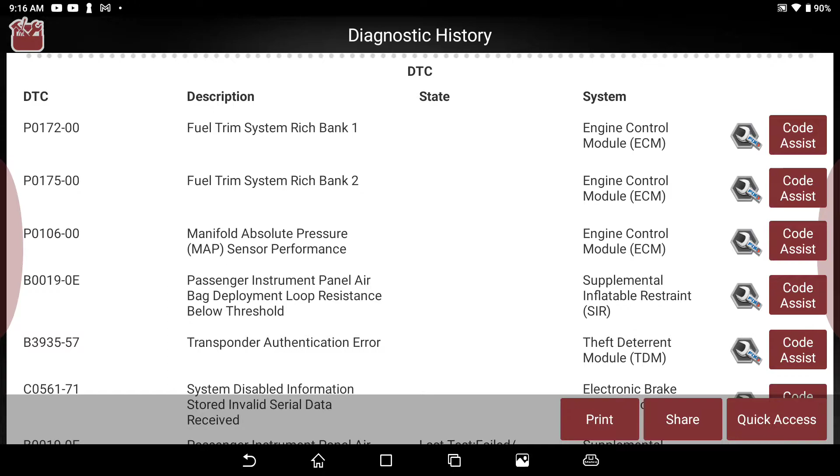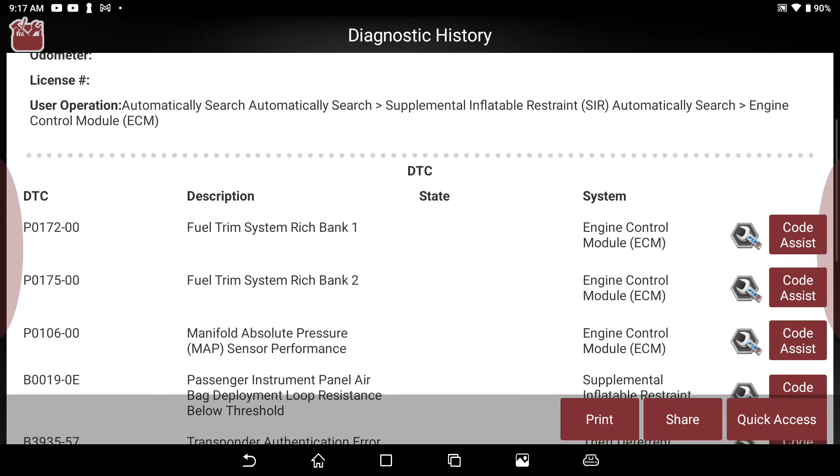We went in and worked on the instrument panel airbag issue, but we also pulled off rich conditions that were setting codes, and a manifold sensor code. We were going to look and see, we've erased most of this already, but we clearly still have a trimming concern present in the vehicle.

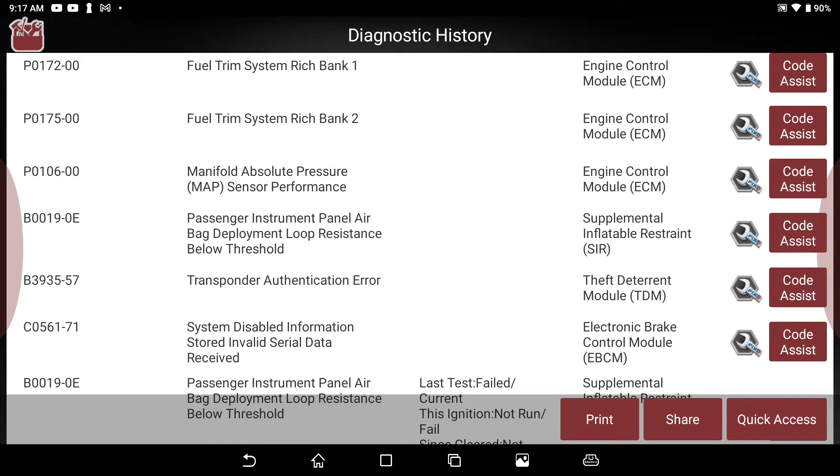I'll show you some of this. We'll go into Maxfix on the B0019-0E, pull it up, and close out the ones that were open so I can show you how this functions.

We have diagnostic trouble codes. We're looking at the OE code, let it finish. This one was on the instrument panel. B03 we don't see on that side, so we'll move over one more. Again, there it is: instrument panel airbag deployment loop stage resistance below threshold.

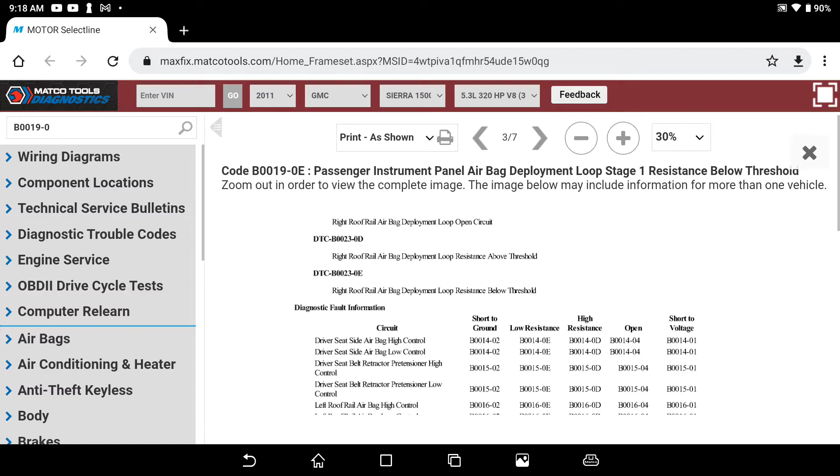That's the code we had. I don't think we can enter from this one, but I'll take you through the other data stored. You can see a 02 is short to ground, 0E is short, low resistance, 0D is high, 04 is open.

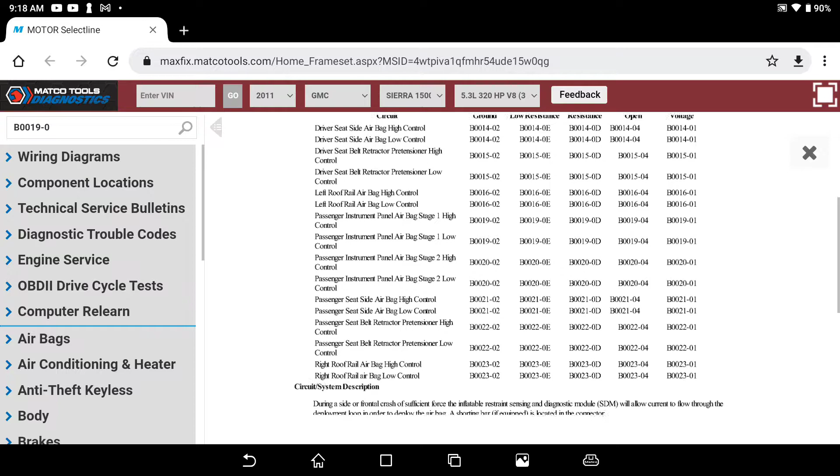Short to voltage is 01. If you look at these as they send them to you, you can see them across the top there, short to ground. We can go into wiring diagrams.

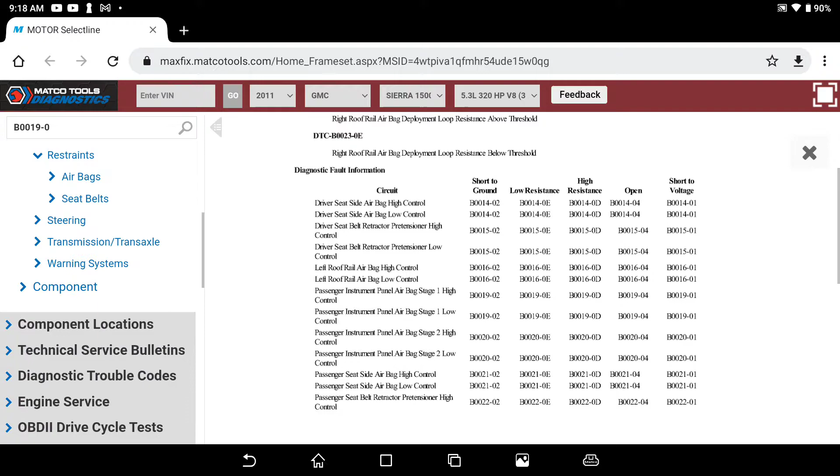From here, we'll go into wiring diagrams, system, we'll pull up restraints, there it is, airbags. This is what? I believe that's not the one. Yep, that's not it, we'll go to the next one. There's what we're looking for, I believe. Yes, this is our inflatable restraint module, steering wheel module.

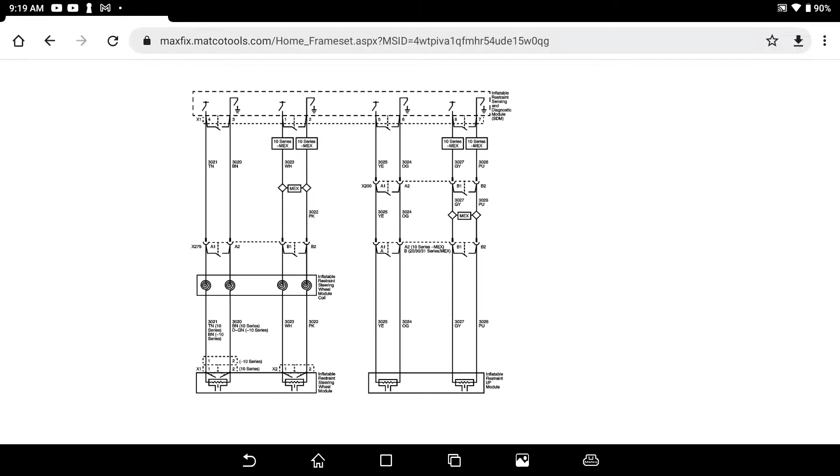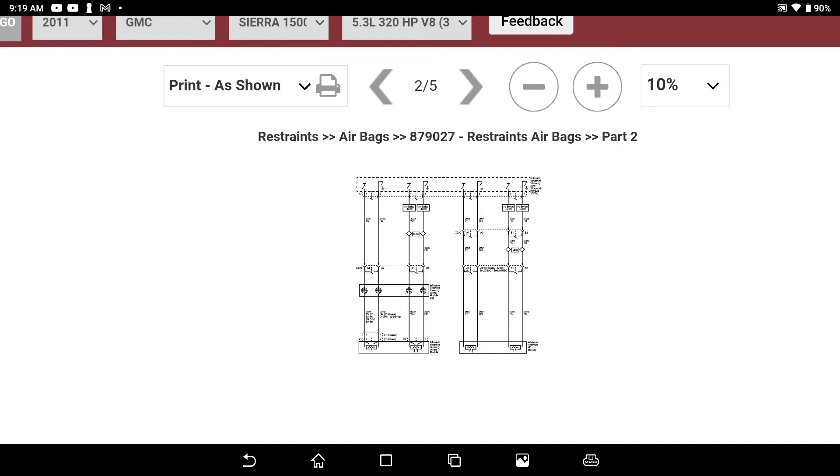This one is present in the instrument panel, passenger side. And what it's saying is, I think B1 is our issue. I need to verify, but that is the issue on that one, where we've got low resistance to the circuit, saying they're shorting between each other, more or less. That's what we got going on.

We corrected that yesterday. Found a chafed wire, the way it routed through inside the dash, shorting on an actual metal strap that secured it to the structure that was part of the instrument cluster frame. Then there's a little tab in there that bends over, the wire hangs in, and apparently just chafed it and shorted to each other. Odd one, little bit of trouble to find.

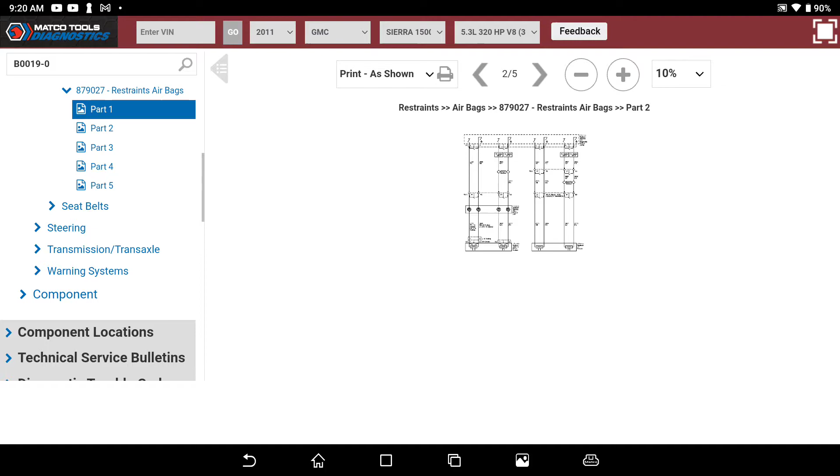All right, we'll get out of here. We'll go ahead and start a scan, which I believe all the codes are cleared, so we're not going to get anything from it. So we'll go ahead and exit, and we'll go ahead and go to automotive.

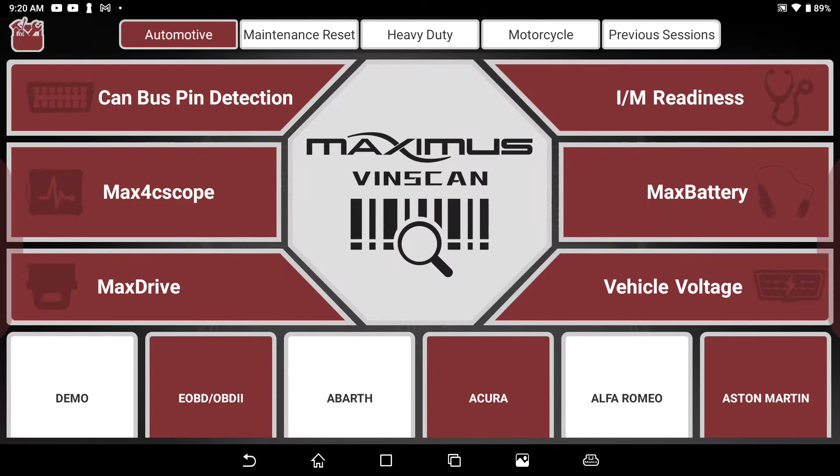I'm going to do a full system scan for you. Switch is on, I believe, I'll check. Switch is on, we'll see if there's any codes in the engine module.

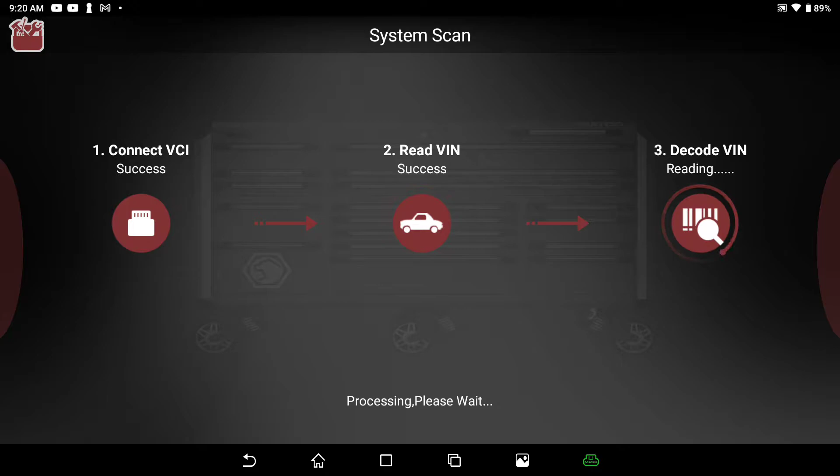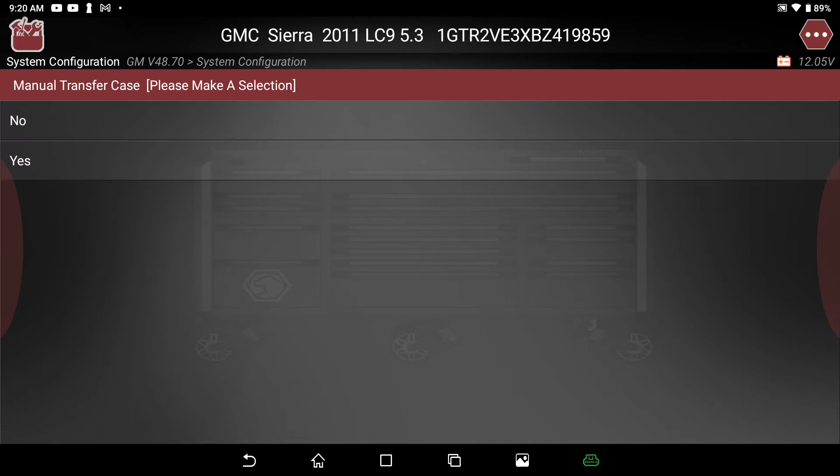We got many codes elsewhere that we're not pursuing. Hopefully you guys can hear my audio, I don't know if you can. We'll do a diagnostics, this is similar to the launch platform. You'll see it as it's presented: we have no manual transfer case, we have automatic air conditioning.

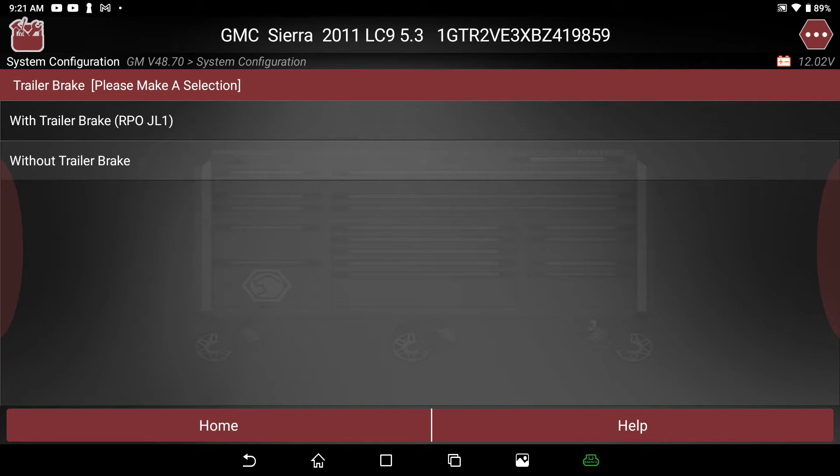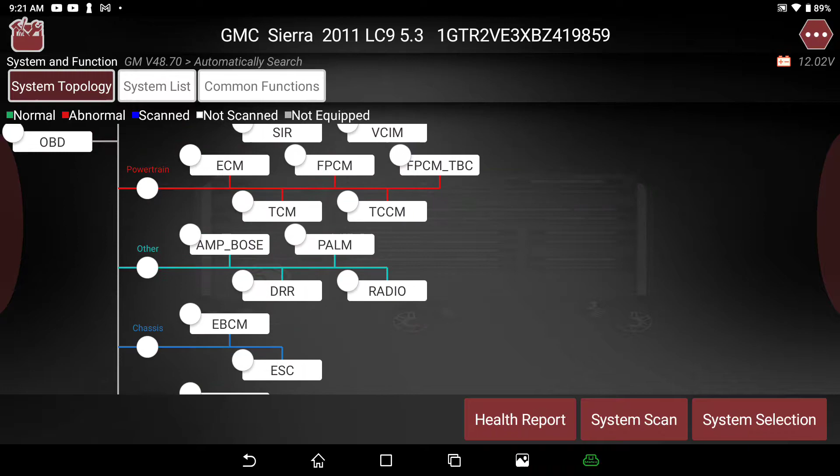Alright, so now we're going to do a health report and see if the ECM has stored any codes. Did a little run yesterday. Yes, we got 2 codes stored. My suspicion would be the P0171 and 174, I believe it was.

Once again, we're not concerned about any other module at this time. Let's see if our airbag module is still not having the code, since we corrected the issue with the wire. Hopefully it does not, figuring we must have solved that one.

Finding that problem, it was a current code, a hard code, constantly returned. Found the wiring, corrected the wiring, the code did not return. Yesterday, got off of it and moved on.

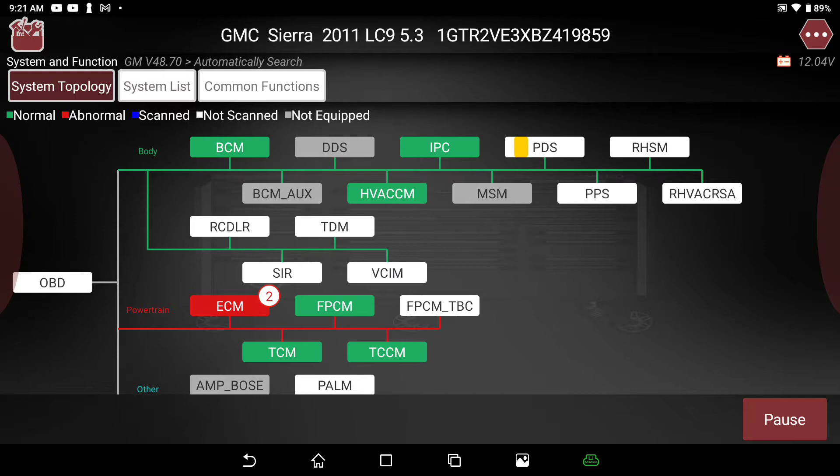Did a clear and then ran for a while and saw a poor running condition, obviously. MAP could be a contributor because we saw a code on the original scan of the MAP, and the lean codes, I want to see if they've returned. But this is scanning all modules.

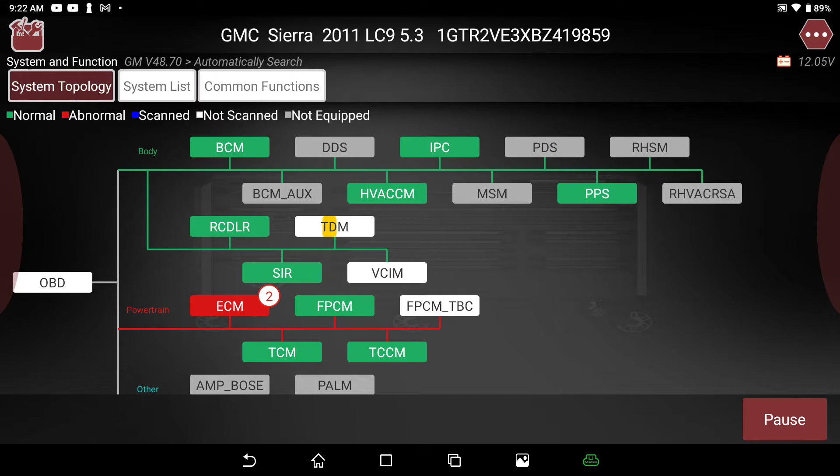Here's my airbag, see, yep, still good. Lucky enough, solved that problem apparently.

Are we all done? We got one to go. So all modules have now been scanned. So we're going to go into engine, and we see we've got the 175, 170, 172, 175. They've reset, no surprise. So we're going to go in here.

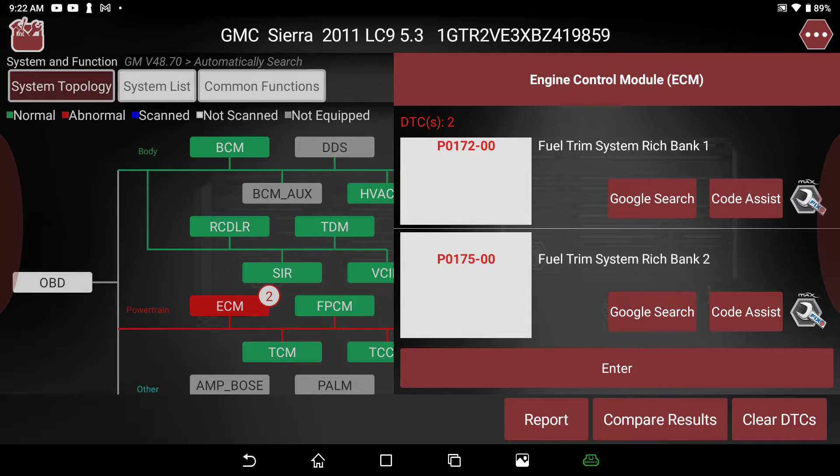We're going to do a full scan again, or read fault codes, and we'll see our freeze frame. And we'll look at the freeze frame and see what trim state is at the time. Freeze frame.

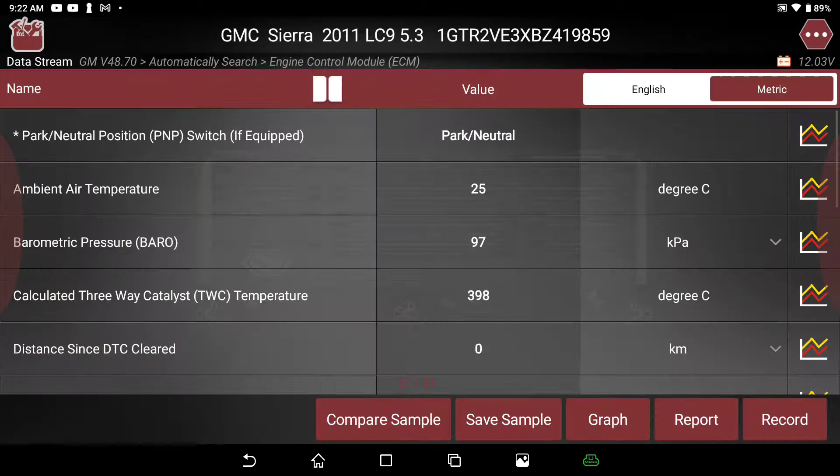MAP 2, we probably should take a peek at MAP. Fuel tank pressure sensor, we're not pulling any vacuum. Makes us think purge is not causing a problem, if the sensor is correct. That's the next question.

O2s, not really showing rich in this condition, but our trims are really negative downstream, whereas my upstreams aren't quite so negative. That might get us something for a little hindsight, because we're not trimming that hard upstream, but our downstream is really asking for some trimming.

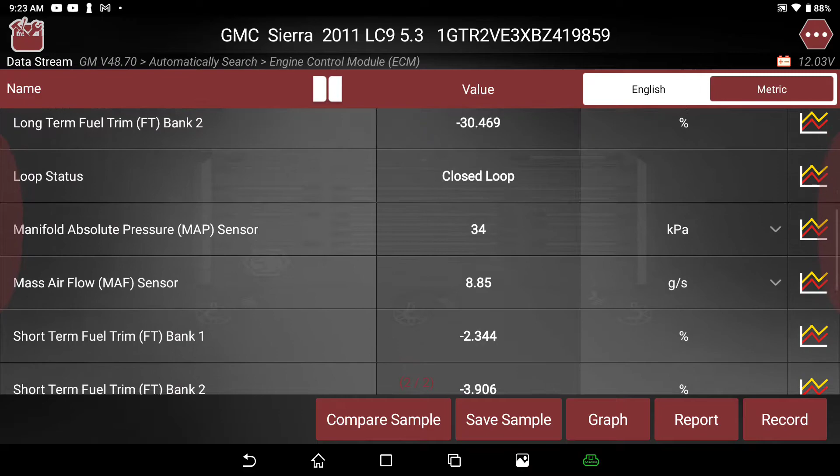TPS is at 10.58 percent, that would need a little investigation. At an idle, it's probably in the vicinity. What's our actual engine idle? Does it give it to us? Might be on the page before, let's take a look.

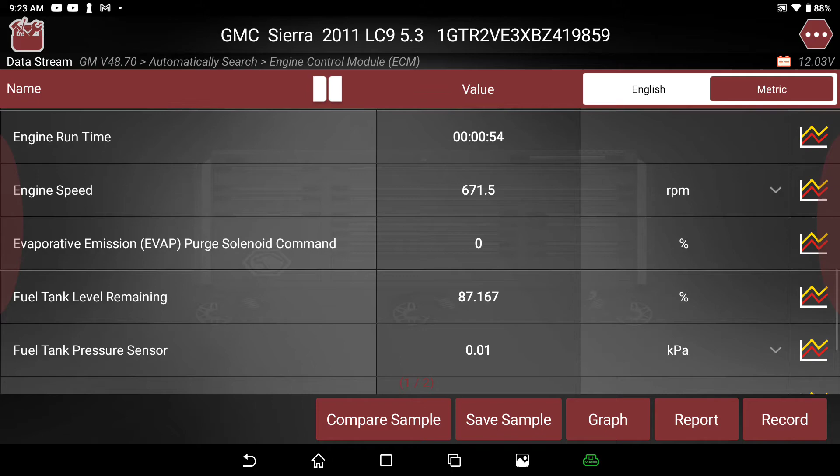Engine speed 671.5, that's in the vicinity of an idle, so it looks okay. I did not see the map, take a look again. Map. Oh yes, our map looks questionable. Let me change that to HG.

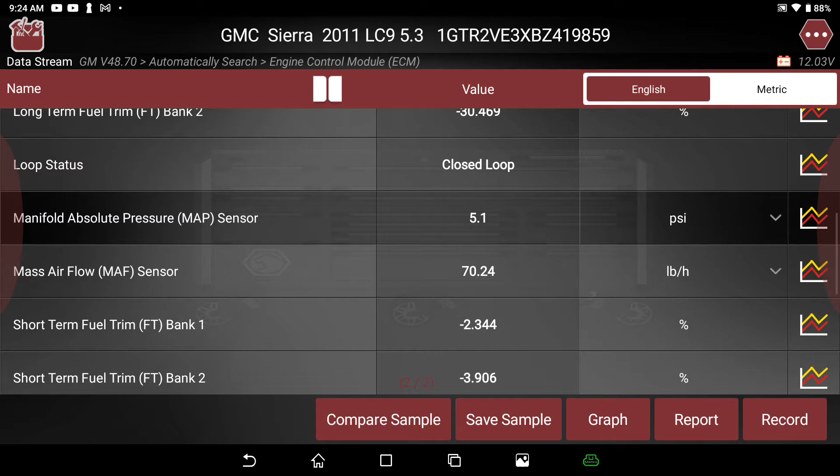There we go. Looks low. I can't get the voltage, unfortunately. I'm more familiar with it. We'll do a quick look, but it looks a little off to me.

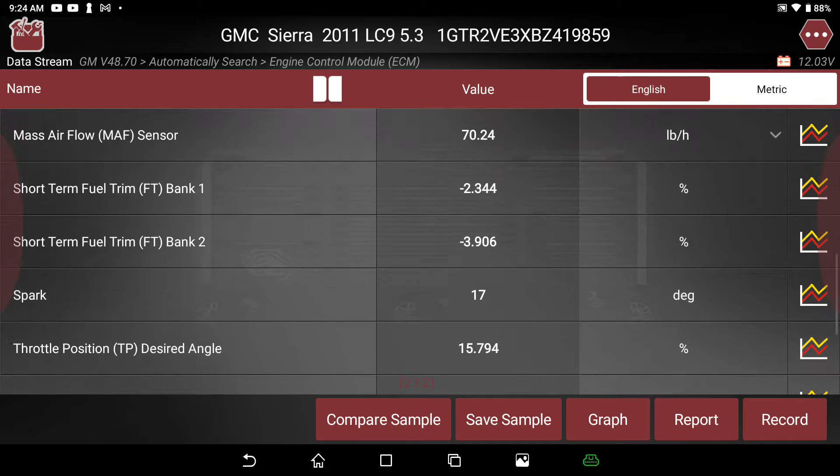So our map may be a contributor, or just a symptom from our fuel trim condition causing the engine to run poorly. But that's, you know, food for thought, an area to look.

But we have the screenshot. What I'm going to show you here is I can simply hit report. I'm saving my freeze frame, and I'm going to go back and save to the other page because it won't save both. Hit report, save that freeze frame. Now I've got that freeze frame saved.

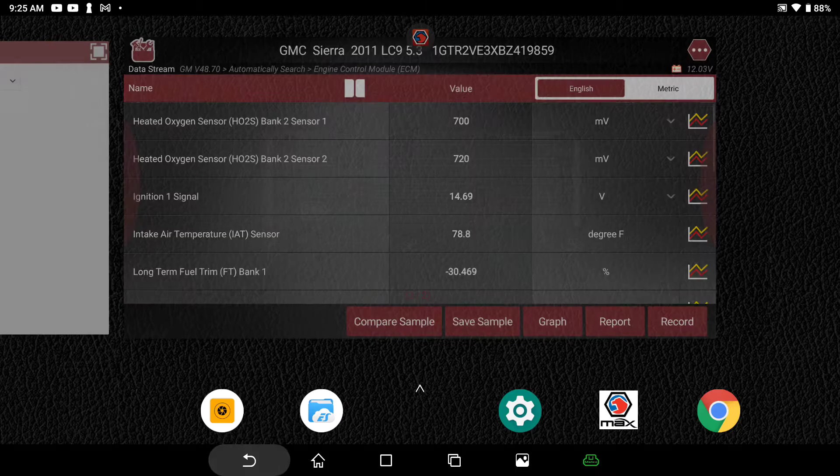It's actually saved. When I did my full system scan, it was already saved. We'll go ahead and jump out here, get back in. We'll go over here and pull it up for you. Here's our reports - this is my full system scan that was saved without saving.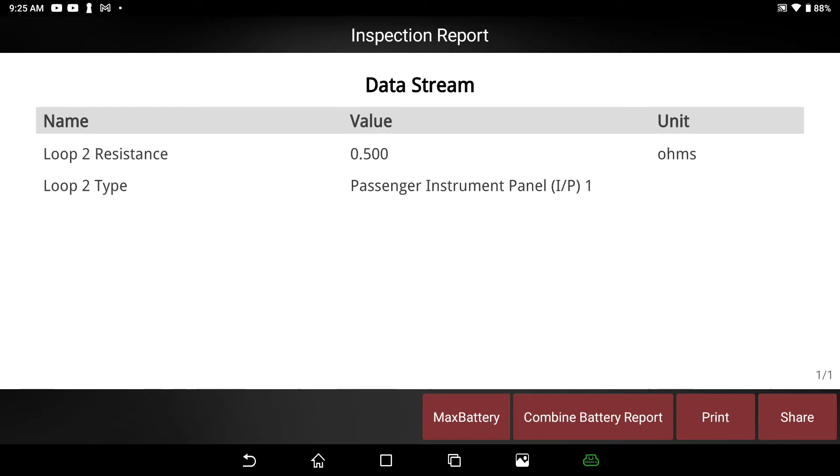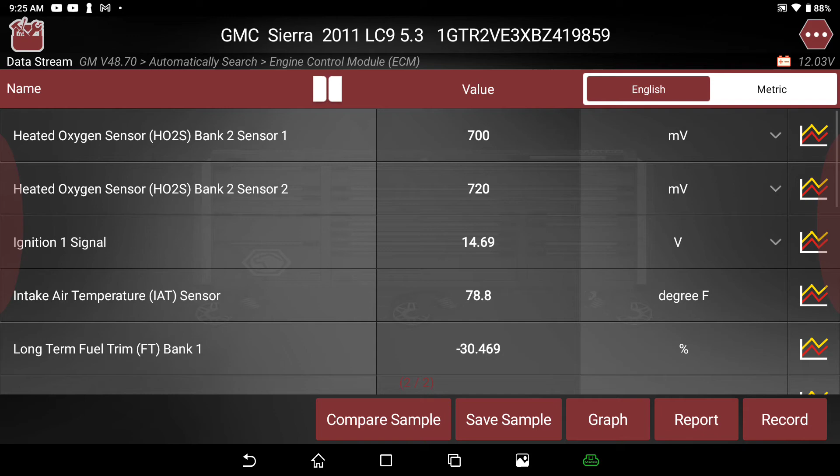Nope, wrong one. We may not actually have saved it. This is my freeze frame. So let's exit, exit, go back to our scan tool. And we'll go back to the freeze frame. All we gotta do is exit here, and we'll be back in our freeze frame.

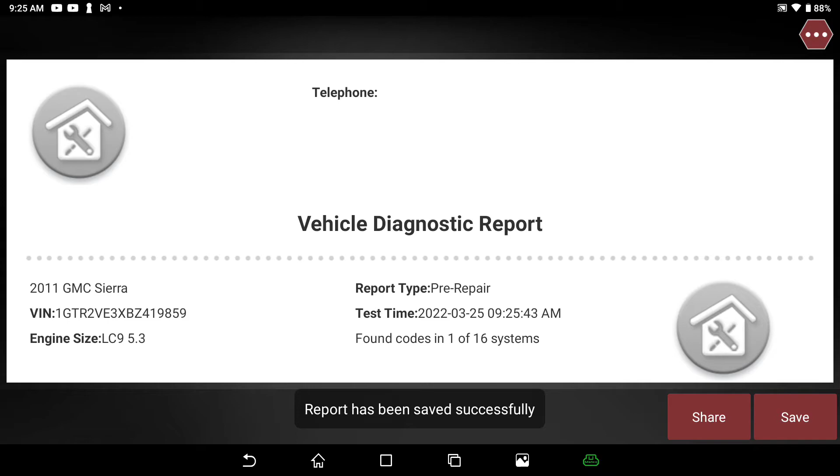And we'll go ahead and report, save the report. It's saved, now the report is saved. I've had some cars where it saves automatically - this one didn't, I don't know why. Let's make sure it did. It has been saved. All right, back in the ECM.

As you can see, the tool navigates fairly quickly. Really don't have much issues. I'm going to go ahead and start the vehicle and do a look at the trims real quick.

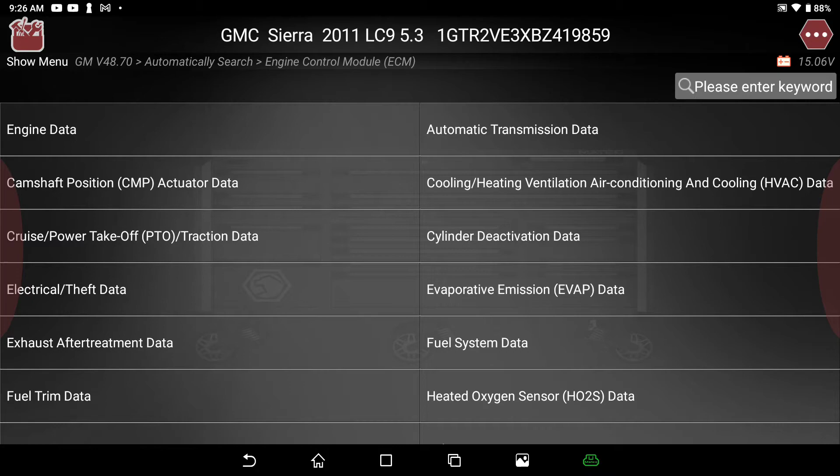Exhaust is obviously modified too - you can see that by the sound. I want to go into the fuel system. We'll go to fuel trim first. Airflow calculated, barometric pressure.

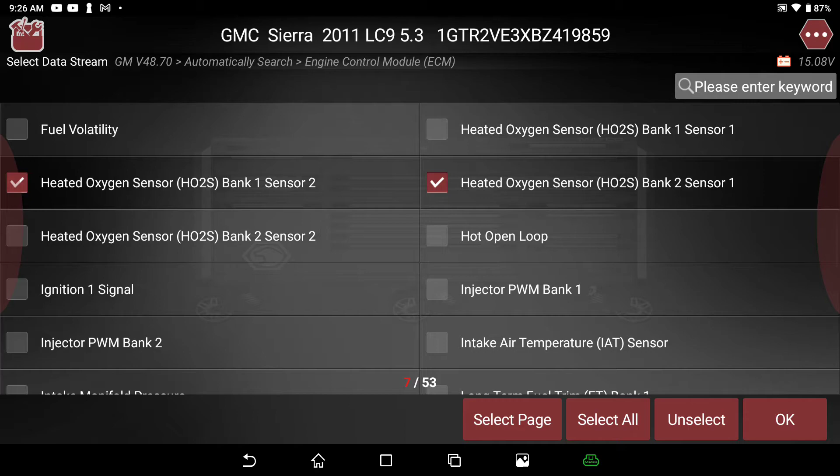Streams, and both downstreams, intake air. And here's long-term, short-term. We can actually load these.

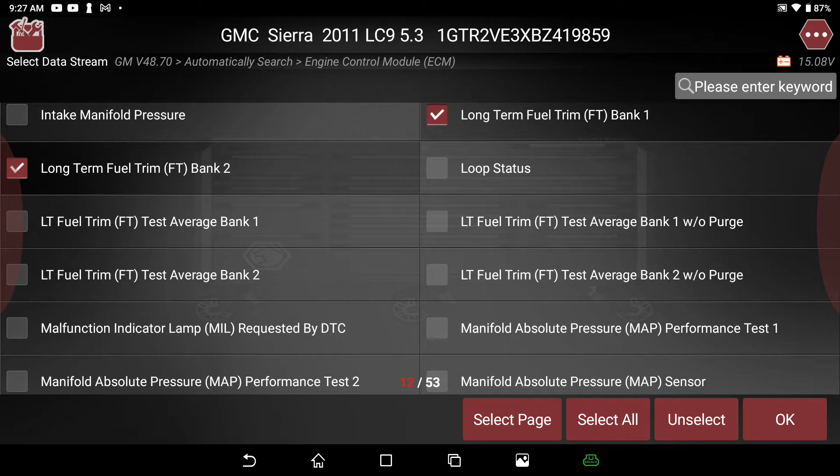This thing handles it very well, by the way. I'm not going to look at the map test. Long-term fuel trim bank 1, long-term bank 2. I do want to actually see mass airflow, and I'd like to see actual manifold pressure.

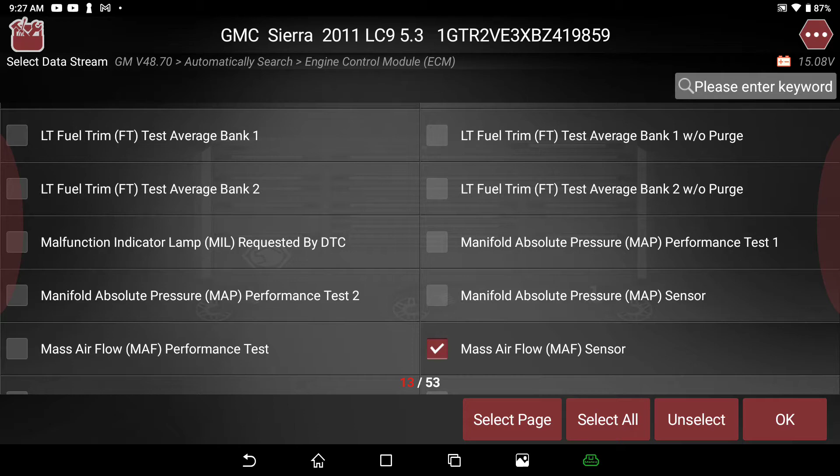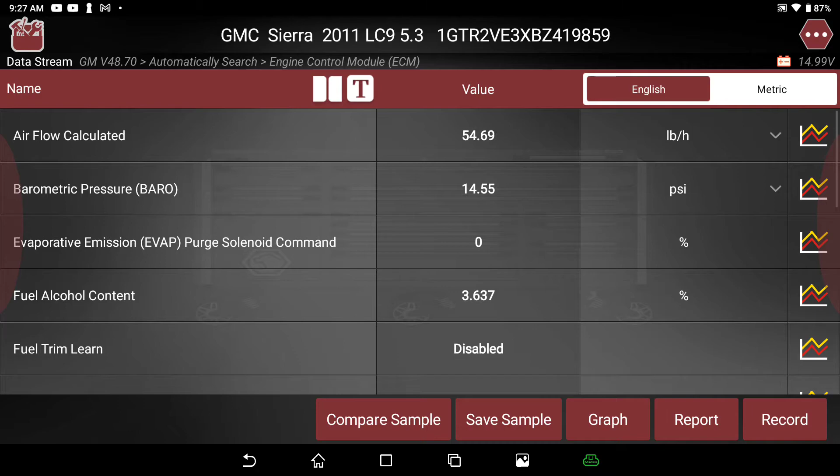There it is. Short-term. Alright, we'll grab those for now, pull them up, we'll go ahead and do a graph. We've got them up, I think we've got them all in there, yes.

I don't think that is normal. I'm used to seeing 8 to 9 on these engines. So that seems odd - that is definitely a questionable contributor.

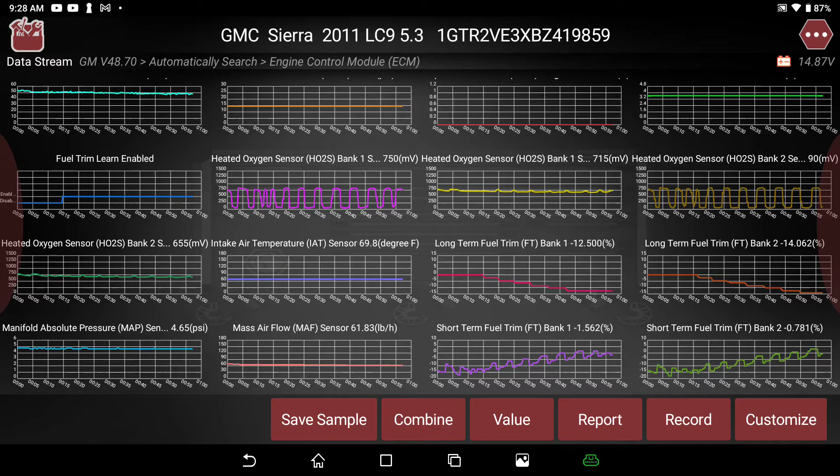Where is our mass air, calculated flow 46? Of course, the setting is pounds - it's one of the things. The fuel alcohol content is 3.67. I reset it yesterday to look into this after seeing fuel wasn't - it was 10%, I think it was reporting 15.

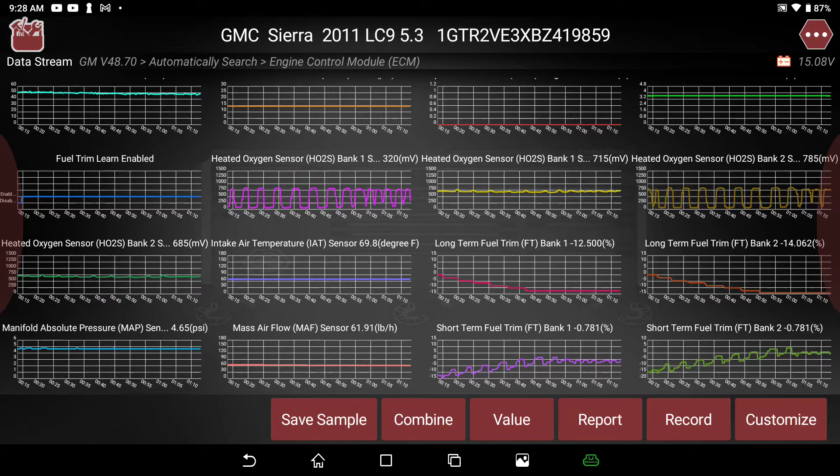Where is that mass airflow sensor? I don't have another window, so it should be right there. It is, yeah, that is questionable. Let me exit and pull back up and load and see what that mass air has to say.

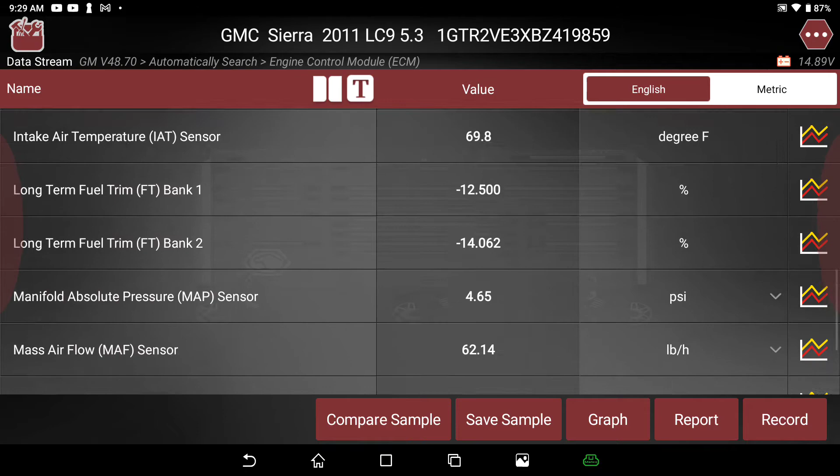Mass airflow, we'll change the setting. That's pounds, let's go to metric. Grams per second, 7.34, so it's not that far off. This is a 5.3, so we're slightly off.

We're slightly skewed. They do have a modified duct tube that looks slightly larger than OE, because I got another vehicle in the shop - the OE is considerably smaller. But I just want to present some of the stuff that this thing gives you.

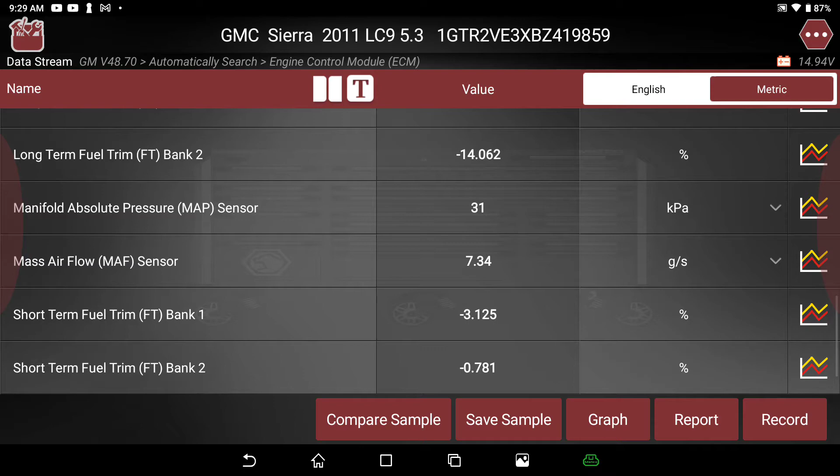You have your Maximus Fix, your data stream. You can pull up data stream from here, and of course load your fuel trim data if you wish. I'll just select all on this one - you'll see how quick the tool responds. It says I can only do 16 in this area, but if you're in the other area, you can.

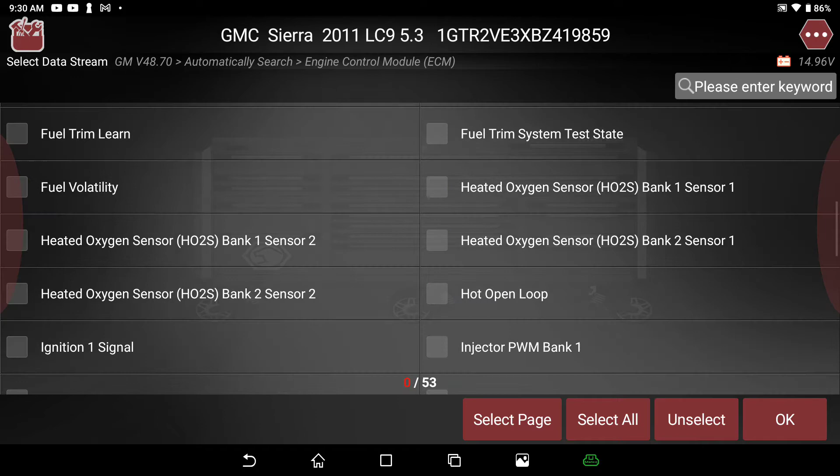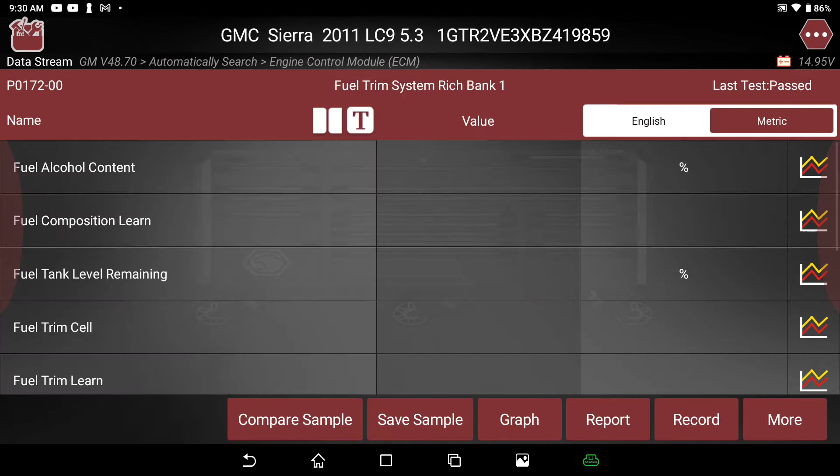So I'm just going to load some, we'll load 16. Out of nowhere, around 16, should be close - you see how quick it presents it. Pull up a graph, I missed one. Go ahead and exit that again. As you can see, the tool operates very fast.

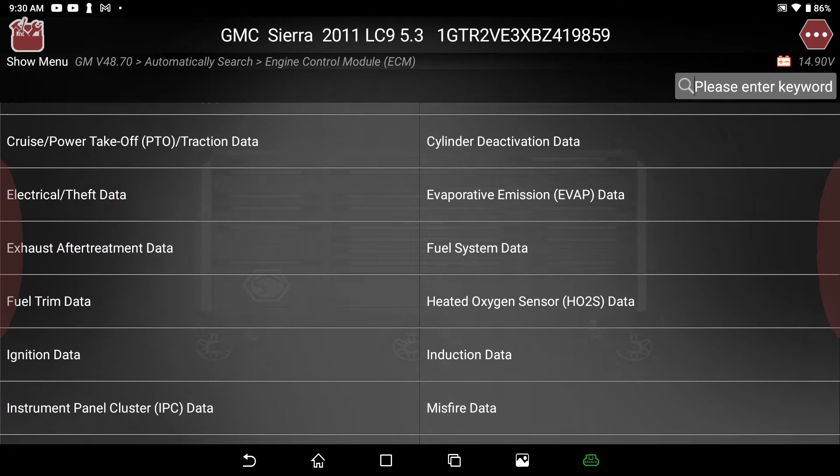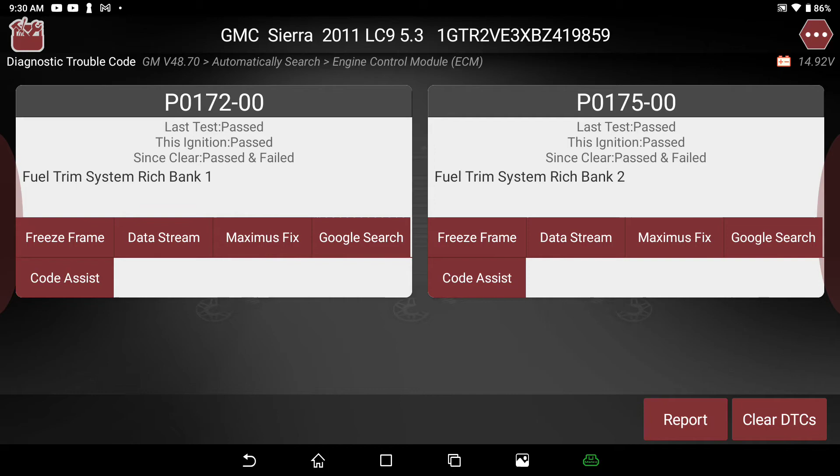And in my opinion, it is fast. Let's go with engine data. We'll select all 62. Although we're back in the same area where we can only select 16, so I'll enter it different this time. We'll go ahead and exit and pull up your data stream. And we want event data.

Now it pulls up your event data. You go to your Maximus Fix from here. It will actually pull up the code that we loaded. There it is, pulls up the code, gives you information, your so-called Intel diagnostics. You see you've got some information in here.

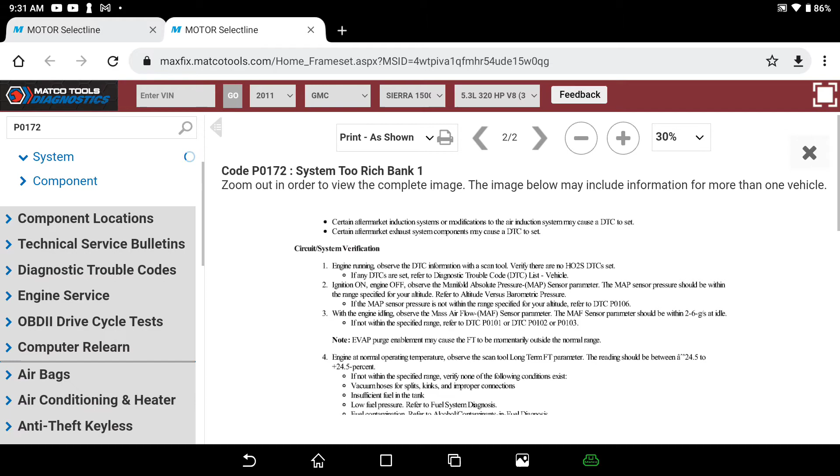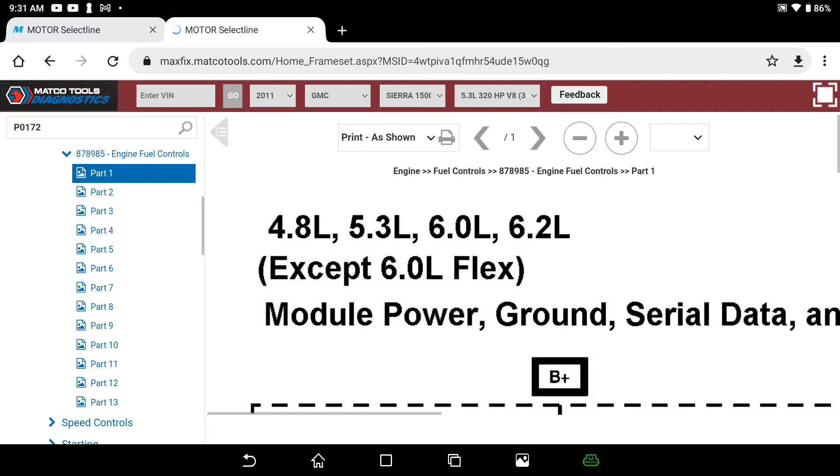You want your wiring diagrams, back over in system, and engine, fuel controls, and you get all your wiring diagrams loaded to you and presented to you. Part 1, 13, 2 of 13. As you can see, and of course zooming, that's not a big deal.

Similar to an OE, they suggest it is OE. Looks similar, but I can't verify if it is OE.

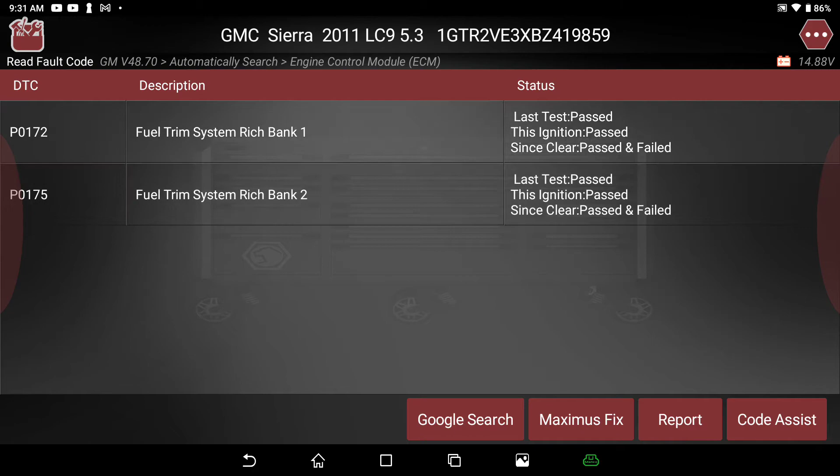You can see basically we're accessing in so many different areas, and you have additional DTC information. You pull up the freeze frame, diagnostic test status, not ran since clear. Let's pull up a diagnostic test status on this one. It's more or less our monitors and our code settings.

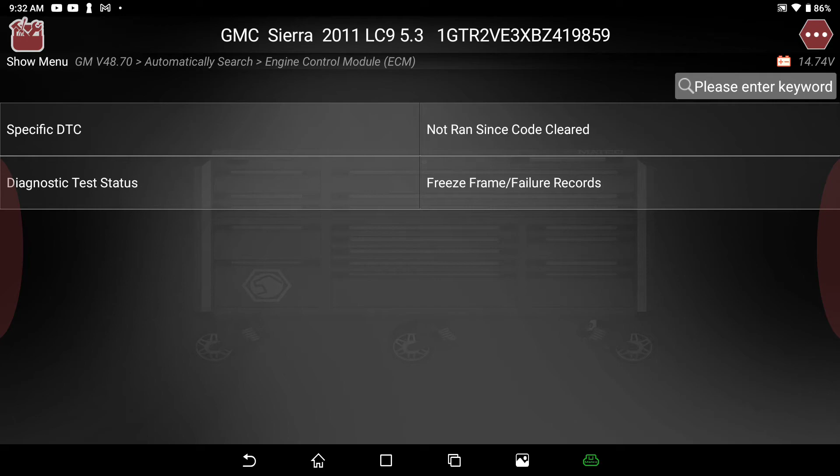Alright, and then we'll pull up freeze frame from here. Same thing, get your freeze frame. There's so many different angles they present it to you. It's hard to keep up with all of them, but I've gotten familiar with it, and I move relatively quickly.

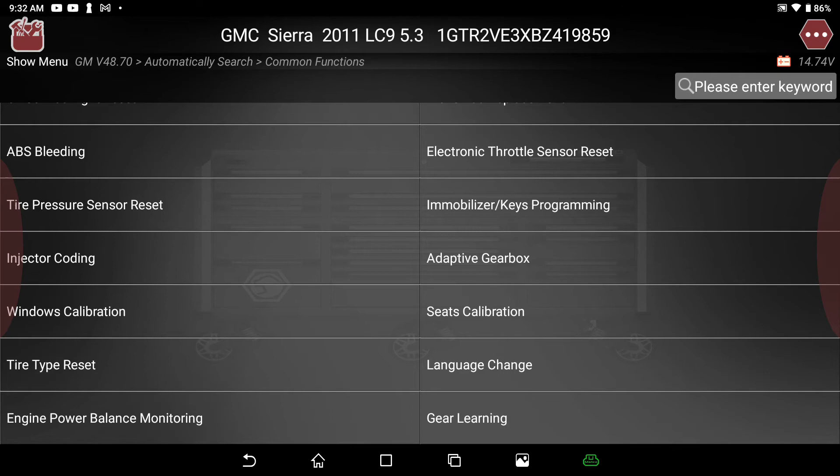Special functions, O2 sensor learn, idle learn, camshaft position variation learn, all in that area. Get back out, common functions. You've got all your common functions learned in here. We'll go back in the engine again.

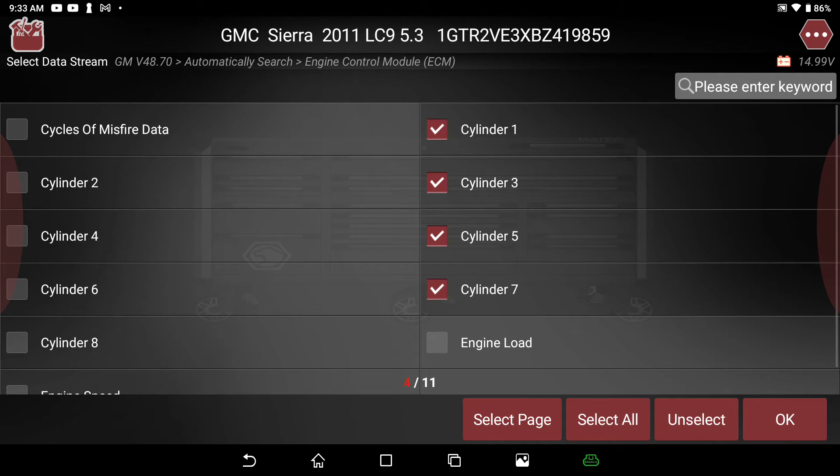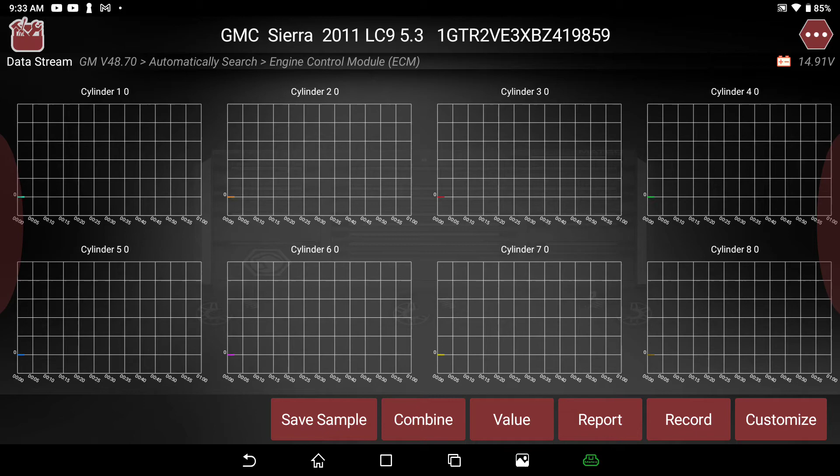Not sure how it loads, but it looks similar to the - there you go, there's your graph on misfires, so you can see, fairly quick. Fuel system, what options are available: cylinder balance, fuel injection balance, fuel trim enable, fuel composition, all the above. And of course, we can kill cylinders.

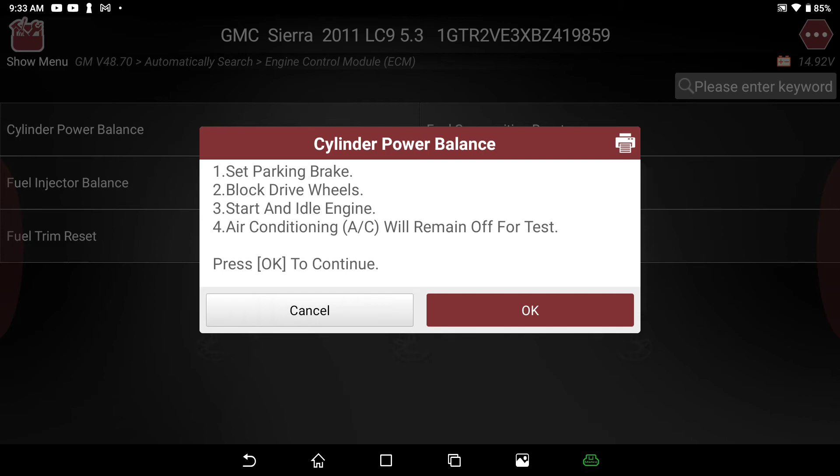Set parking brake - I won't. See if I can actually kill one. It's enabled, we'll disable, it's disabled. We're going to misfire, so yes, it functions well.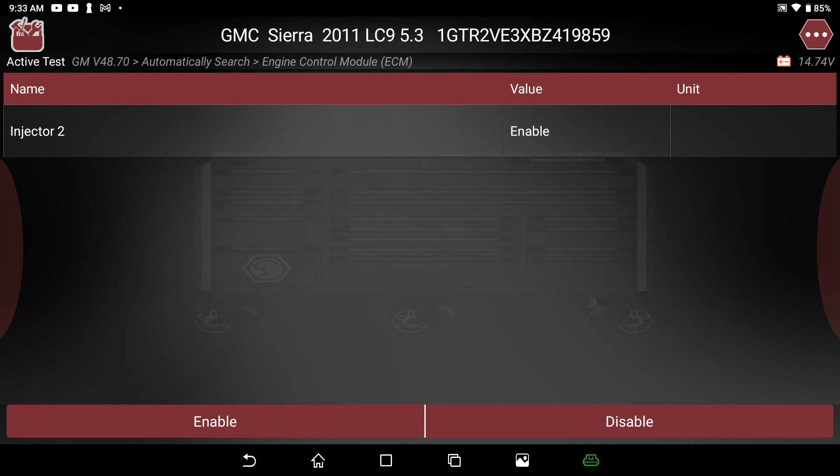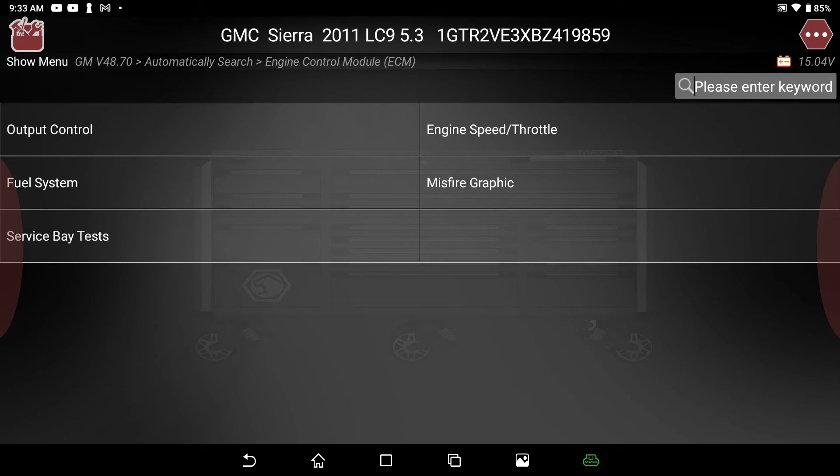The only thing I don't like about this right here is it doesn't give me data. So let's see if we can get data from the other area. We'll go into actuation, actuation test. Output control, fuel system, same options probably going to be available.

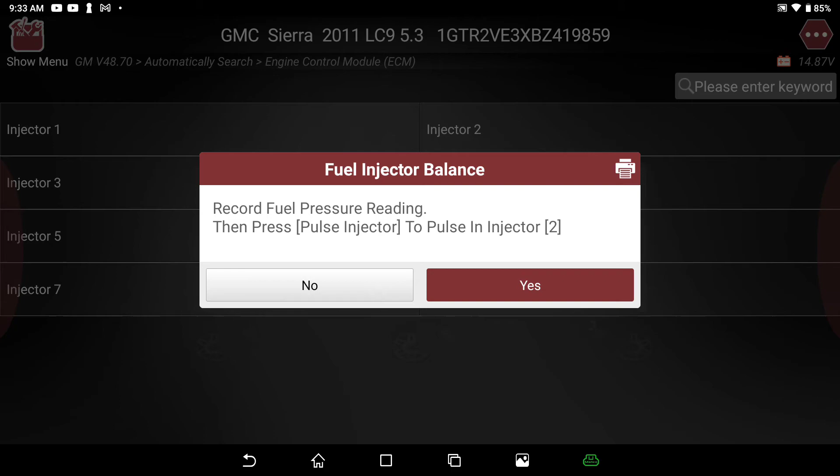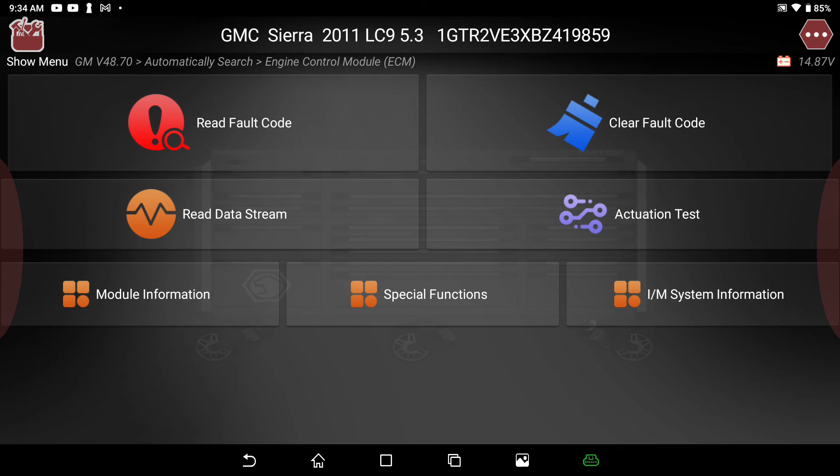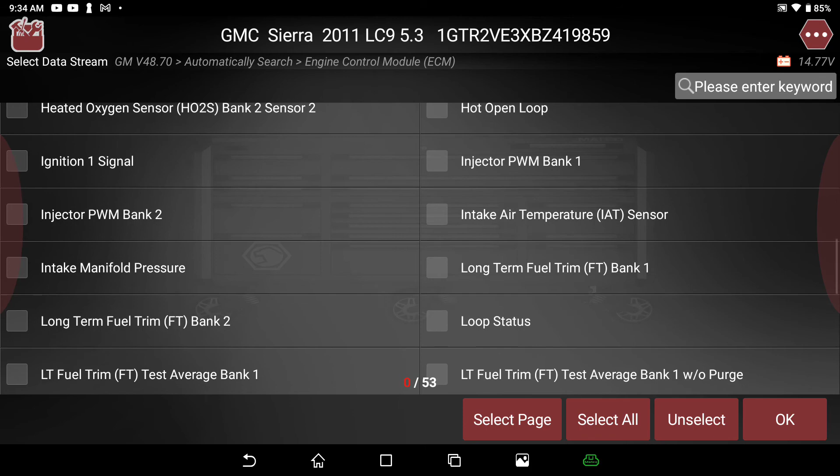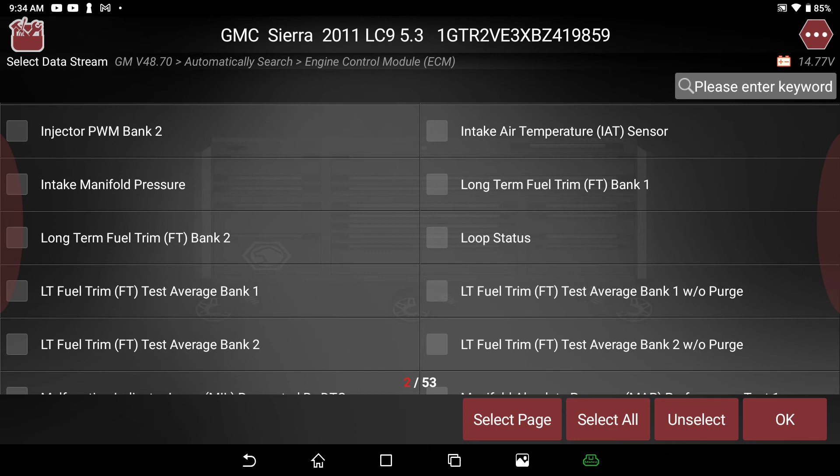So we'll go back to data stream, and we want fuel trim again, and we are actually going to generate a vacuum leak. I want to see trim states, all I want to see. That's the test, I want to test their short term, long term, test the average, long term, and there's our trims. We'll jump in here, we'll pull up a graph. I'm going to generate a vacuum leak by disconnecting brake booster.

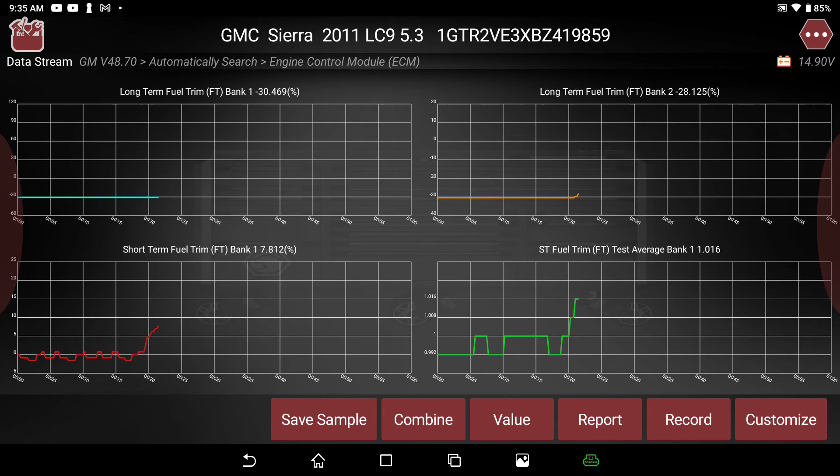How they would respond, they immediately start to react, all of them. So makes you think we do not have an O2 sensor problem. We've seen quick response out of that vacuum leak generated. Now we're heading back downhill for trimming.

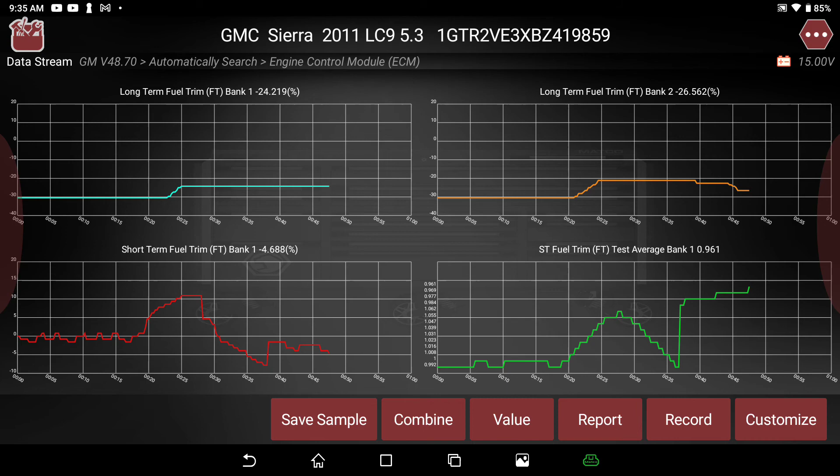When we take fuel away, our long term is more delayed. Our short term is getting back to where it was before we did that test. But we've seen the quick response, so we're getting away from that.

I'm going to save this video and share it. It's mainly for the tool, but I figured I'd add a little troubleshooting to it while we're at it.

I'm just getting into this fuel issue that this vehicle is having. We'll dig into it deeper. Let's check ECM and see what special functions are available. No programming, I already showed you.

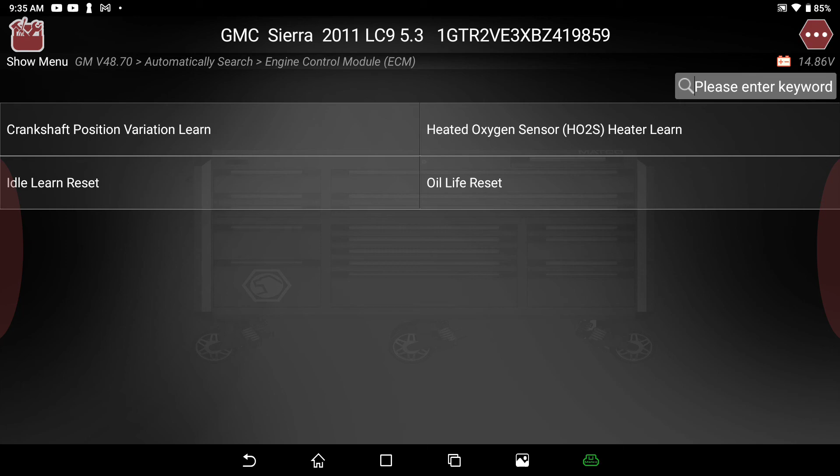Alright, well I hope you guys enjoyed the video. This is more or less to show the Matco Launch platform. Give everybody a little insight on this tool. It seems to be pretty swift in my opinion.

You have a system list, you have topology. I've learned the function from the topology very well because windows like this are presented where I can actually get into my code without even bothering to go into the module. That way I can move on to the next module relatively quick just by tapping out.

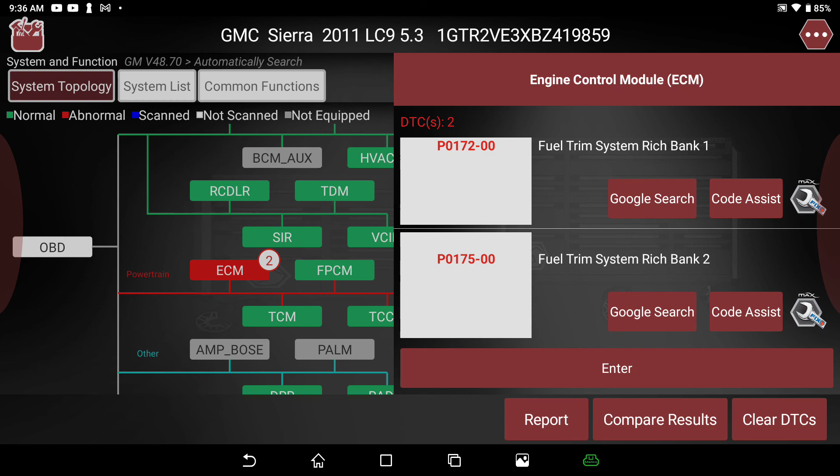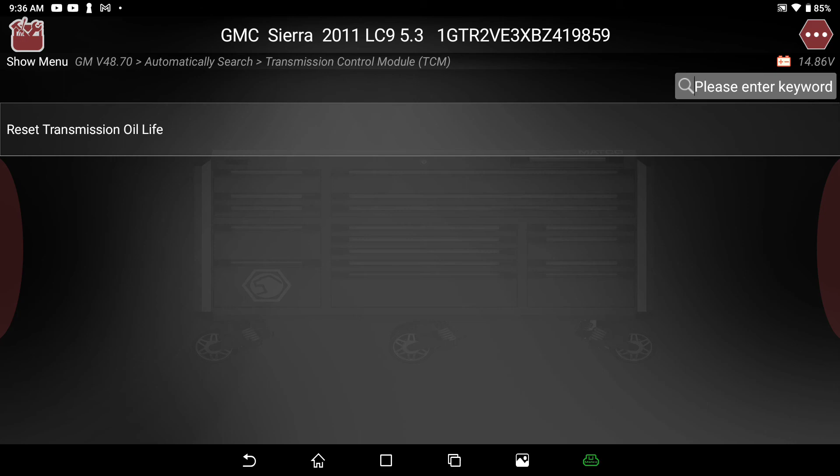Hope you enjoyed the video.